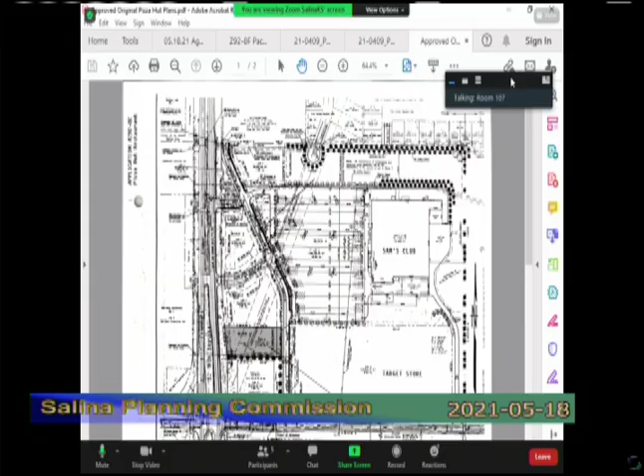By way of background, what is labeled or known as the Matlock Johnson addition was approved by the Planning Commission in 1992. That was a subdivision at the northeast corner of Schilling Road and South 9th Street, anchored by a brand new Sam's Club. There was a plat of 44 acres with multiple lots, including outlots along 9th Street. The City Commission gave final approval to ordinances that annexed and zoned that property back in 1992.

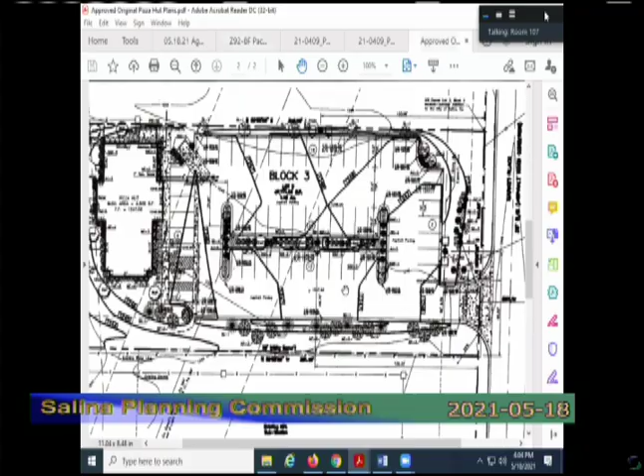It was a planned commercial district, so the ordinance provided that site plans for the remaining lots must be approved by the Planning Commission before building permits were issued. In April of 1994, Pizza Hut Restaurants filed an application requesting the Planning Commission approve their final site plan for a proposed 3,500 square foot Pizza Hut restaurant on the lot south of Red Lobster. That was essentially the 5th outlot outside of Sam's Club proposed for development, and it was the last lot to be developed in the subdivision.

Dustin, could you go back to the original layout of Matlock Johnson, the vicinity map? So the layout of the subdivision was 44 acres at this corner. You may recall that Schilling Road was nothing more than a dirt road at that time, so the developers constructed Schilling Road over to an access road here, and then constructed Marketplace as a frontage road.

You may recall that at some of our intersections like Belmont and 9th and other locations where we had frontage roads right next to 9th Street, there was barely room to stack one car or even get your car straightened out to make a turn. So we changed our planning philosophy on frontage roads—instead of having the frontage road run right next to 9th Street, you'd move it out so lots backed up to 9th Street, moving the frontage road away so you could have more room to stack traffic and move these entrances away.

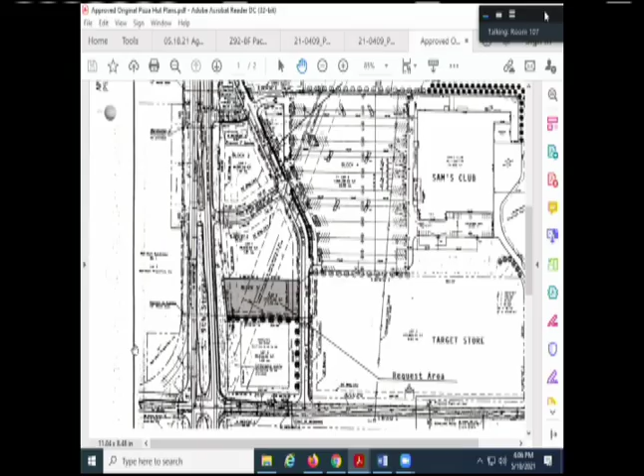This is a substation right here, and this lot is affected by a 100-foot wide transmission line easement that runs diagonally across the property. So the original plan had a single building, 3,500 square feet, covering only 7% of the lot. It had no direct access to 9th Street, and the front of the building faced east towards Marketplace. When it was originally developed, they had 57 parking spaces in that area. The building was pushed way to the west because it couldn't be built under these power lines, and that really influenced how the property was developed.

So the plan being put forward now is to essentially remove and rebuild that east building and turn the existing Pizza Hut restaurant into a delivery carry-out location only, with no indoor seating, adding a drive-up window on the south side of the building.

There's also a plan to create a second tenant space there. As you can see from the original Pizza Hut plan, the east portion of this lot was primarily used for parking or not used at all. So the owners are proposing to construct a new building with a 2,000 square foot footprint, which could be set up to accommodate 1 or 2 tenants, and also set up with a drive-through window on the west side if that's what the tenant desired.

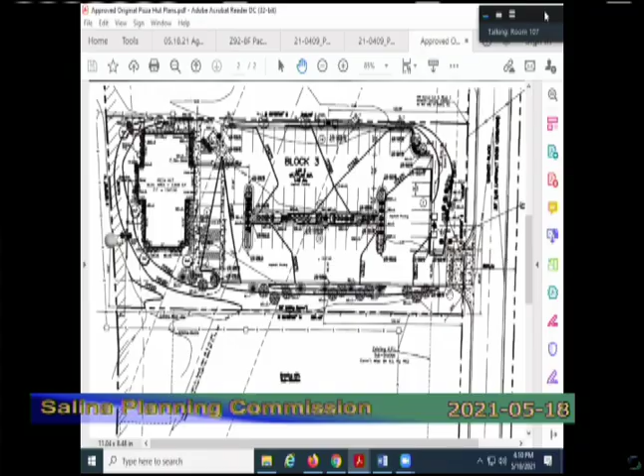The current driveway there is 25 feet in width, and the maximum driveway width allowed under city code is 30 feet measured at the property line. As part of this amended site plan, the property owner's designers are proposing to maintain the single driveway entrance on Marketplace, but they're proposing to expand it from 25 feet to 46 feet measured at the front property line, apparently to try to accommodate truck traffic and deliveries.

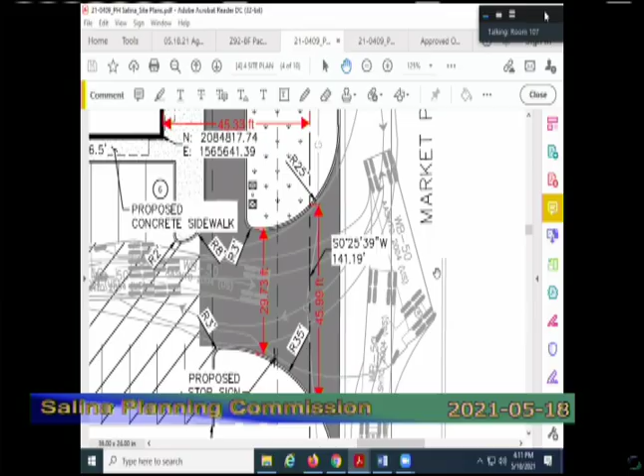In reviewing the plan, staff would note to the commission that in addition to exceeding the city's driveway width standards, the proposed driveway far exceeds the width of any other driveway on Marketplace and is even much wider than the street itself. Staff has reviewed this and believes the curb cut width being proposed is excessive. We've noted that Sam's Club and Target both receive truck deliveries, and none of their driveway openings are as wide as the driveway being proposed by the developer's designers. None of the driveways that serve the new Dillons store are that wide either, so staff believes that is excessive for the conditions currently on the lot.

Just by way of information, the city, based on the city code, measures the width of a driveway at the property line. What the designers have done is something that most haven't done, which is to try to increase or include the radius inside the property. On most driveways on public streets, the curve radius would start at the property line and fan out, but they have extended it farther in, which affects the measurement at the actual property line.

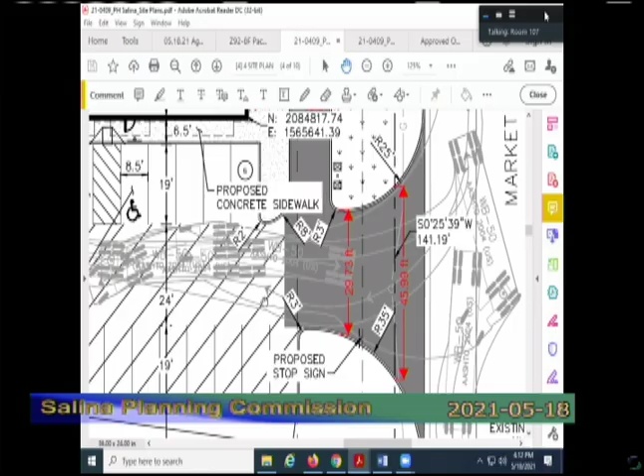So this measurement here is a reasonable width, right at 30 feet. We measure the width that makes that driveway width excessive. You can do what you want with the radiuses out within the right-of-way, but it's primarily this area here that is on private property that's wider than the city's driveway width standard and wider than any driveway anywhere in the vicinity.

As far as the public utilities and services and storm drainage, all the services that serve Pizza Hut are in place and can be reused for this redevelopment.

Dustin, I don't know, you could go back to an aerial photo or to the overall site plan for the subdivision.

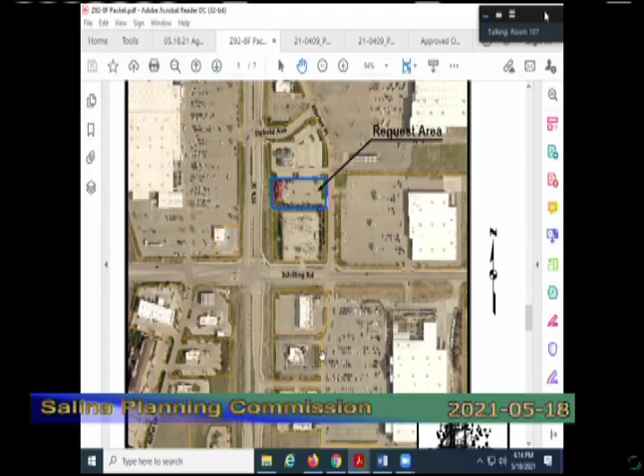Water from Sam's Club and from Marketplace here drains into this pond north of Sam's Club, and then there's a pump in that pond, and a pipe that comes all the way across here and sends the water right to this corner. It goes down 9th Street to a ditch that crosses over and goes that way. So the water first drains north and then it drains south, and the reason for that is there has been off-and-on flooding along South 9th Street from water moving south to north. This was essentially reverse engineered to send the water back here so it wouldn't be discharged to the north.

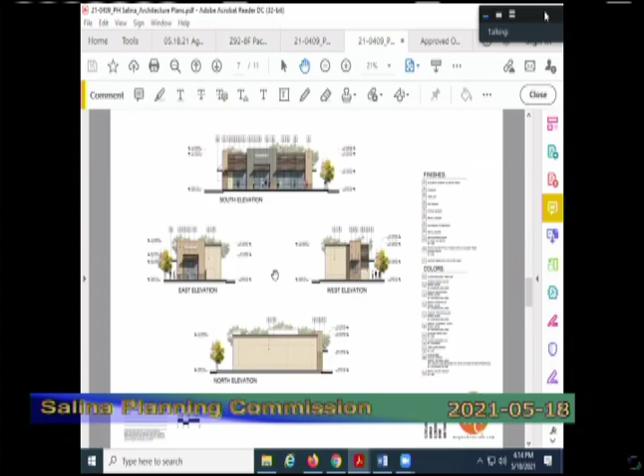The buildings that are proposed would be oriented to face east with their main storefronts facing Marketplace and secondary entrances on the south side. That is the east building. You can see the main storefront glass, the main width is the south elevation, but it will also have an elevation oriented towards Marketplace.

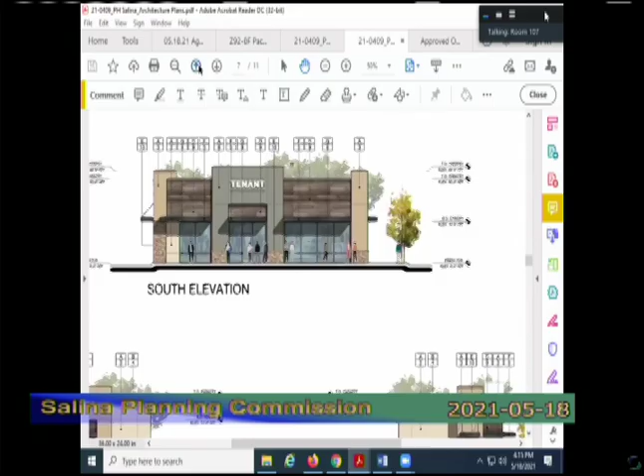Because Pizza Hut is transitioning to delivery or carry-out only, there will be a drive-through pickup window on the south side of the building. The east building face is being designed to accommodate a pickup window on the west side. So this south elevation facing the substation is where the pickup window for Pizza Hut would be.

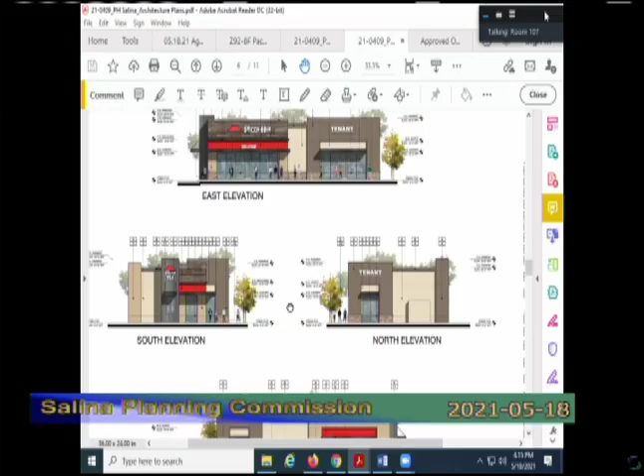This is what you would see from Marketplace. This is what you would see from 9th Street. And that is what is facing north towards Red Lobster.

The building setbacks all conform with minimum setback requirements. The west building, 27 feet from 9th Street, is pretty close to 9th Street compared to the other buildings along there, but it's because of that 100-foot wide Evergy transmission line easement that forces that building to the west.

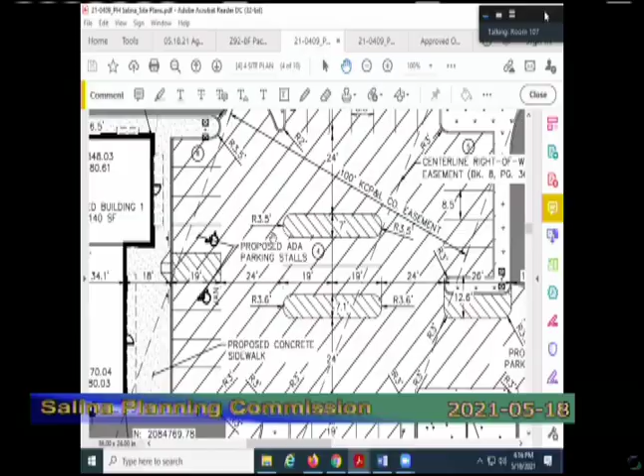So the big changes are that the lot coverage would increase from 7% to 10.7%. The other being that only 37% of the developed site would be green space.

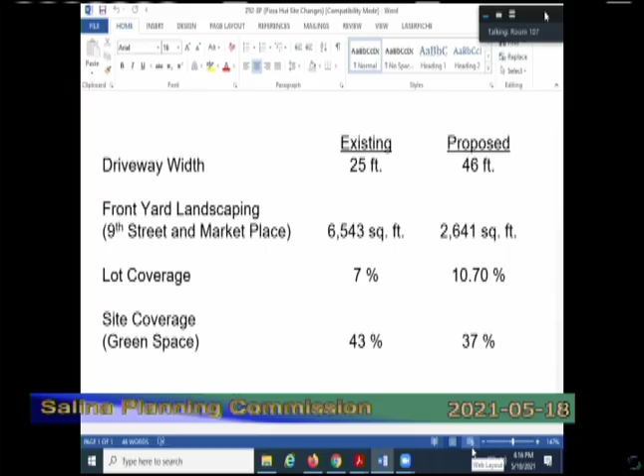As far as the building design, from what we can tell, the exteriors will be primarily cement plaster finish with stone veneer on the storefronts, mostly earth tone with slate color used to provide contrast. You can note the bright red canopies to identify the Pizza Hut.

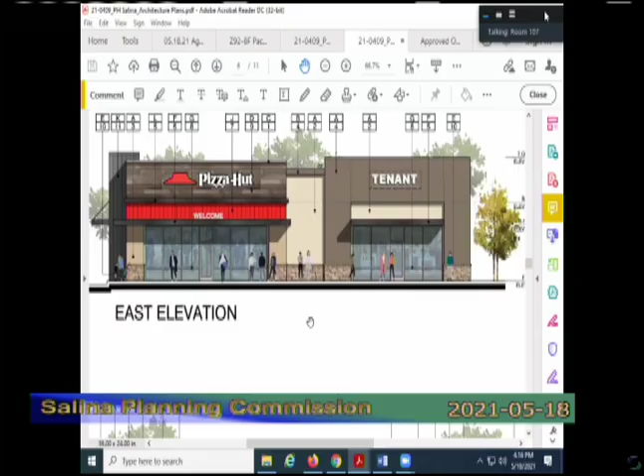As we noted, 45 spaces are being proposed. The primary reason for the reduction is the elimination of indoor dining at Pizza Hut. We've determined that 45 spaces is sufficient, and all of the dimensions within the parking lot and driving aisles meet the city's requirements.

Staff's only issue is with the width of the actual driveway approach on Marketplace.

There are no designated loading and unloading zones or areas designated on the site plan, but as we've discussed before, particularly with restaurants, in the alternative we've allowed the property owner to furnish staff with a written letter confirming that supply deliveries for Pizza Hut and other tenants would occur outside regular business hours. If you do that, it doesn't matter if drive aisles or parking spaces are occupied by delivering vehicles if it's after hours.

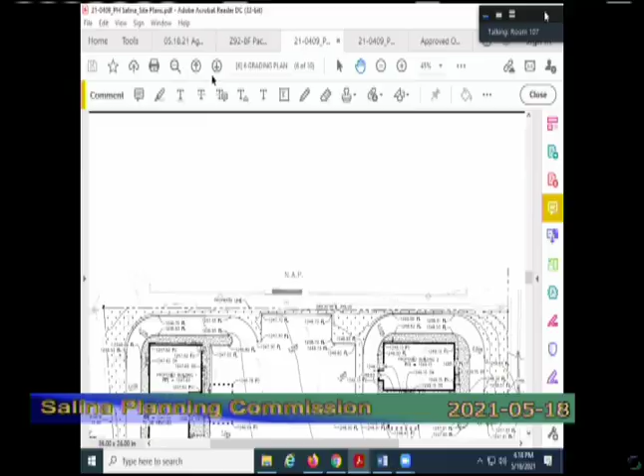The other thing we would note is that this development would have a requirement, with the two front yards, of a little over 3,900 square feet of front yard landscaped area, and they're providing about 2,600 square feet, about a third less than what would be required under our ordinance. The primary reasons for this are twofold: one is the drive-through lane paving added to the west side of the west building essentially substituting concrete paving for landscaping, and the wider your entrance drive is, the less space you have for front yard landscaping along South 9th Street.

One of the mitigating factors the designers and owners are facing is that transmission line easement. Because the building is pushed so far west, if you put a drive-through lane on the west side, you've pretty much wiped out the 27-foot front yard there, so there's much less space for landscaping.

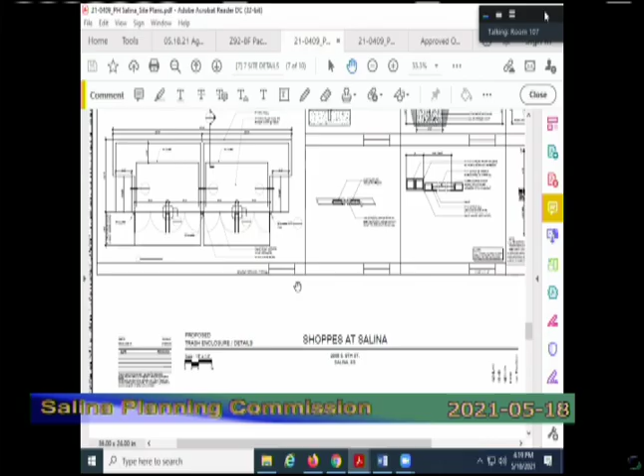If you look at the total amount of tree units provided, it's far less than what was shown on the original Pizza Hut plan, but is within the range in terms of actual plantings of what our landscape regulations would apply for a site like this with two front yards.

The only other subject we haven't touched on was signage, and we did not receive any kind of submittal related to ground or pole signs. The Planning Commission previously approved a 70-square-foot pole sign on 9th Street for Pizza Hut, and that sign may continue to be used or reused. Some of the elevation drawings did show wall signage, but that would be worked out with the owner as tenants come along.

So as you look at your alternatives this afternoon, we have reviewed the plan to determine compliance with city ordinances, regulations, and policies. The two areas that we determine do not comply with city standards are the amount of front yard green space and the width of the driveway on Marketplace.

You are to review the plans to determine if they demonstrate a satisfactory quality of design and compatibility with other uses and structures in the neighborhood. And so you could approve the proposed amended plan as submitted.

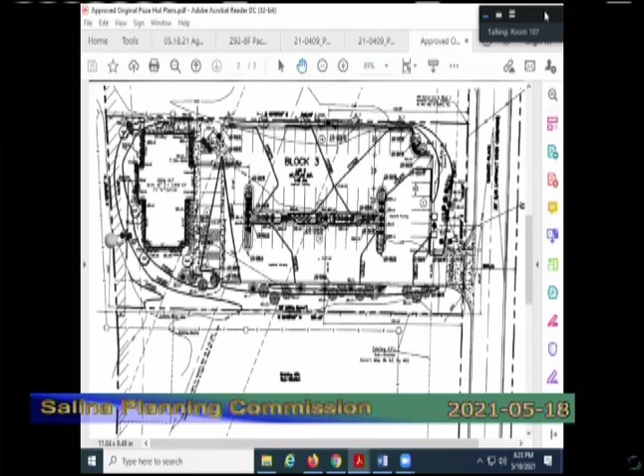The main thing, and it may or may not show up clearly here, is that here's the existing Pizza Hut building. So everything from this wall over to the 9th Street property line is green space and landscaping. And then if you go to the new plan, they have wrapped this driveway around the building.

So all this area that is landscaping today is being eliminated and replaced by paving. If you look at the front yard as the front 25 feet of the property on 9th Street, under the Pizza Hut original plan, 100% of the area between the building and the street was green space. Under this plan, a substantial part of it is paving. So by that very nature, the landscaping area has been reduced.

The question for the commission is you can make up for reduced area by having essentially the equivalent amount of plants or plantings that you would have if you had more area. We have a ratio that says if you're required to have a certain square foot area, you have to have a certain number of plant units within that area. They come close to having the number of plant units they would need if they had the full area, so they are attempting to compensate in two ways.

So it's a judgment call for you as a commission, or myself as a zoning administrator. I can reduce, and you can reduce, the amount of front yard green space if you think the intent of the landscaping regulations is still being met.

So we're just pointing out that the reason for the large reduction in total square footage is primarily because this was all green space today, and if you put this drive-through in there, you're reducing the green space. And then, of course, if you widen a driveway or add a driveway, then you're reducing the green space in the front yard along Marketplace as well.

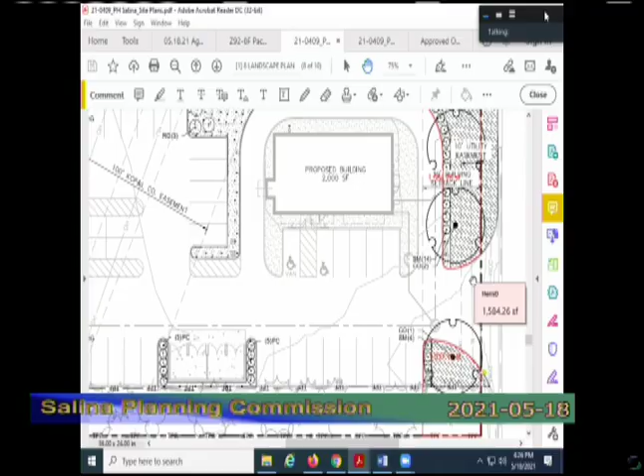So if they reduce the width of that driveway, it would help them out a bit by providing additional green space in the front yard along Marketplace.

There's nothing you could do on the west building, you can't shift the building. Well, can't you shift the building closer east and move everything east to have more green space along 9th Street? You can't do that because this is right to the edge, and Evergy will not allow it. They don't want tall trees, buildings, or fences, basically don't want anything vertical underneath their transmission line.

My take on it is that lot's definitely offering some challenges that are not the norm. So maybe a little leniency might be my opinion on it. I don't know if anybody else has any thoughts, I agree, Greg.

Yeah, there's not a lot of design options or shifting that they can do. And so if you're gonna have a drive-through lane, you can't shift everything to the east. So circulation-wise, that's the way it best works out. It doesn't really matter whether you have the pickup window on the west side or the south side, that's the circulation that works.

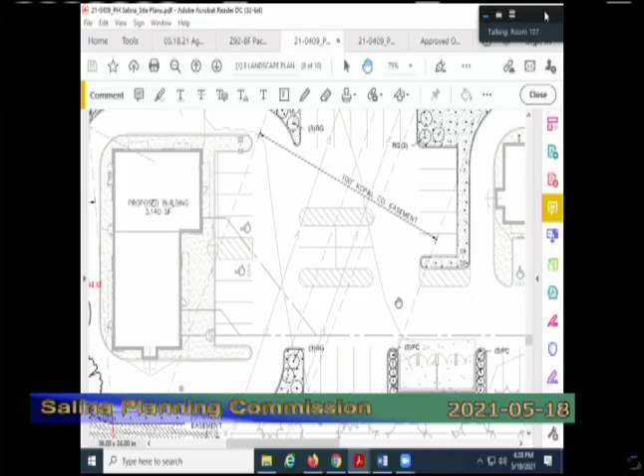And so we would expect that these would have curbs, but these are really peninsulas, though we give them credit as islands. We have a requirement in our landscape regulations that if a parking lot has more than 50 spaces, you have to set aside a certain amount for islands within the lot. Well, this parking lot's gone from over 50 to under 50, so essentially those islands are voluntary. Our ordinance puts an emphasis on front yard landscaping to buffer the building from the street, but you, as a commission, are perfectly free to recognize the efforts they've made for the internal landscaping as well.

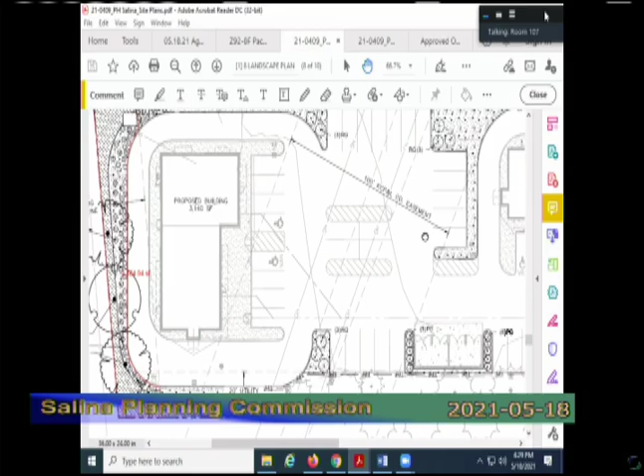So I have a question then on current city ordinance, it's 25 or up to 30 feet through the drive, 30 feet for the driveway, measured at the property line. Right, and so what is the issue with going with a larger width? Why does that become an issue on the city's part?

Why is it determined at 30? The reason it's at 30 is because the most common width is 25 feet, 30 is the max, and it's the same reason a 46-foot street would be confusing. If you have something that's 30 feet wide or 25 feet wide, you can essentially fit 2 cars in it, one coming out, one going in. But if it's 46 feet wide, people may think there's a separate left turn lane, or come out in pairs, or not know what the pattern is. So the reason for the 30-foot driveway is so cars know that one right side is for exiting and the other right side is for entering. But if you're at 46 feet, is it 2 lanes out, 1 lane in? Once you get over 30 feet, drivers don't really know how it's set up, unless you've got an island or something like that. So that's the basis for the 30 feet.

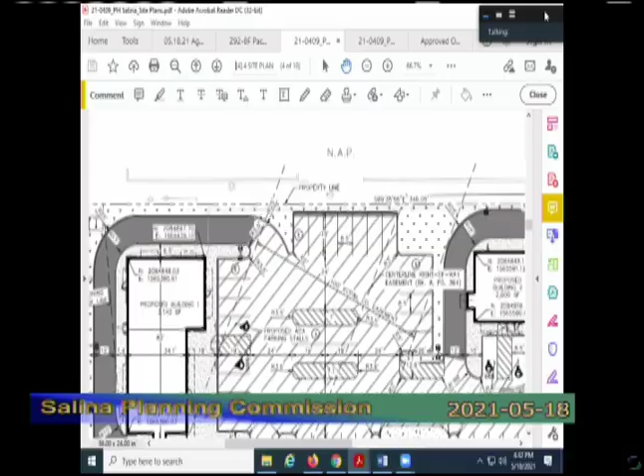Yeah, so for clarification, this says that the measurement is at the front property line, which is right where your cursor is, is that right? Correct. Okay, I'm just clarifying that. That's where the property line is, okay.

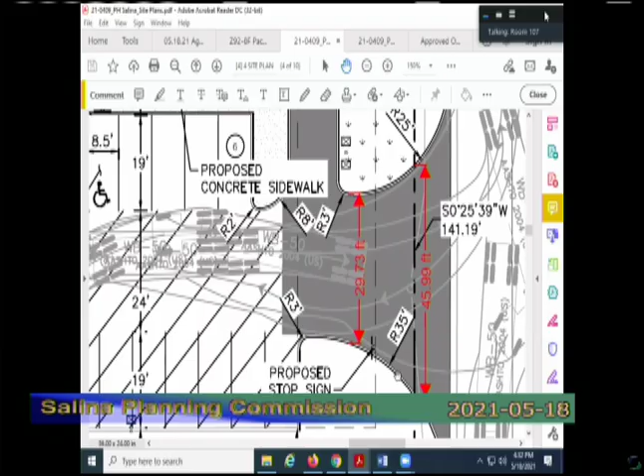So if they took this and extended it at the same angle out to here, and then started their radius, if they kept this same configuration and had the big sweeping radius, it's basically this area here. And you could say it's a technicality, but from the standpoint of being consistent and measuring that width at the property line, having a radius that sweeping is really unusual.

So what we tell people, especially places trying to accommodate trucks, is that you can have as sweeping a radius as you want out in the right-of-way, but once you get to the property line going in, it has to be a maximum of 30 feet.

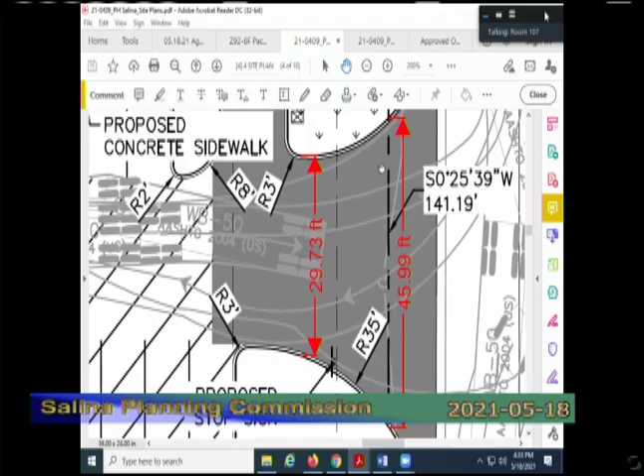The other challenge here is that if you have a street with 13 feet behind the curb, you have more space to have a radius. Here, there's only 8.5 feet from the curb to here, so if they straightened this out and then started the radius curve here, they could still have the sweeping radius for turns or to accommodate delivery trucks, but wouldn't have the 46 feet at the property line. So it's really the big sweeping radiuses that are affecting that.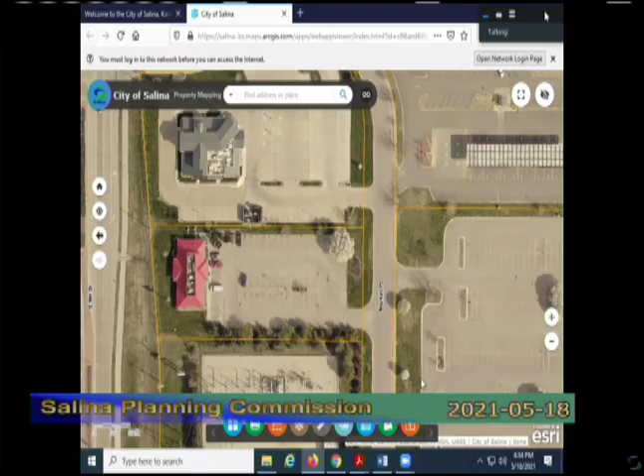So staying on this same vein, in our packet there's a diagram that shows the cars in the drive-through, total number of cars in each of the drive-throughs. Can you pull that up? Can you find the title for me? It says Shops at Salina, proposed site plan, site summary, and it shows vehicles in each of the drive-throughs. Maybe it's the architect's plans. Yep, that's it.

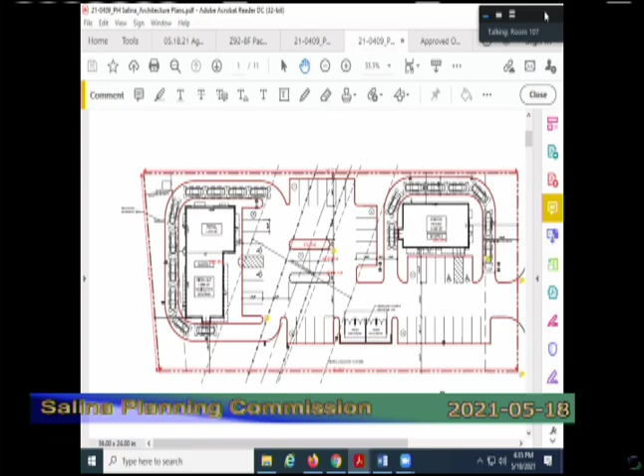So two questions going into this. The requirement for the number of cars through a drive-through, how many do they have to accommodate at the pickup window itself? And where would the ordering station actually end up being, say on this first one listed as a coffee house? My question is, if the order station is towards the front of the building, you're going to back traffic up as people are sitting there waiting to get in. I'm curious if that's not part of the reason for the wider drive and that sweep, that they're anticipating people stopped there, kind of around that corner getting into it.

Yeah, so to answer your question, what we require is 4 stacking spaces at what we call the ordering station, sometimes it's a window, sometimes a microphone setup, and another 4 at the pickup window, for a total of not less than 8. And so they're not actually showing where that ordering station would be, but that is important. In this design, it would have to be about where my cursor is here in order for them to have the appropriate stacking.

So Destin and I talk about that frequently, and I am frustrated every time I go there, but we misread the plans for the taco place in front of the mall. They have like 1 stacking space at the ordering station because we misread and they misidentified. What they have is 7 stacking spaces from the drive-up window to the ordering station, but only 1 stacking space at the ordering station, which means if you get very many cars there, they're all hanging out into the central mall. So Mr. Olson's point is well taken as far as the Taco Bell there goes.

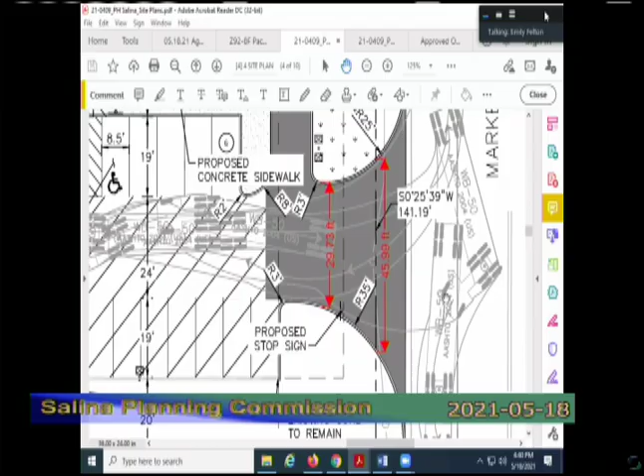Yes, my name is Emily Felton, I'm working with Monica on this project. You'll see grayed out in the background the exact reason why we're proposing this: we've got a WB50 truck who's going to come in and go back out. There's not enough room on site for them to turn around and for a truck to back directly out into our site, so that would be our why. They'll just have to swing out into adjacent lanes in order to make those deliveries work, and we're not anticipating those deliveries happening at peak hours.

As you can see, we discussed the loading here. We haven't designated loading spaces because we do not anticipate the loading to occur during normal business hours. But to answer the question on the table, I believe we can get it down to 30 feet at the property line. Okay, thank you very much.

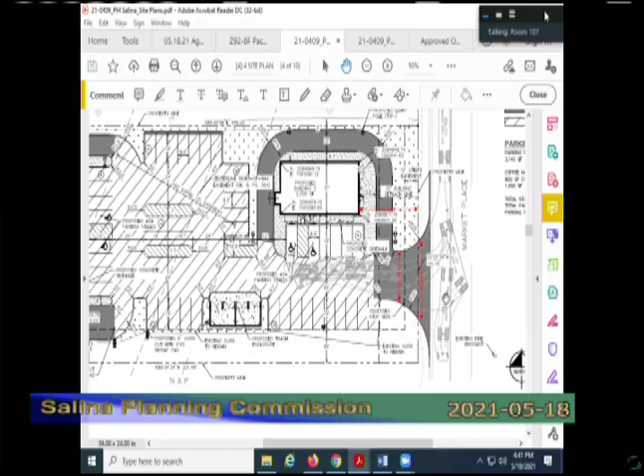And I missed part of that—where's the proposed loading at for each of those locations on this diagram currently? Yeah, so the proposed loading, the truck, you see it grayed out in the background on your screen, thanks for sharing. The truck is just proposed to pull straight in and then pull straight back out. There is no striped area. The loading is—because the loading is not occurring during peak hours, there's not a designated station or parking space for this.

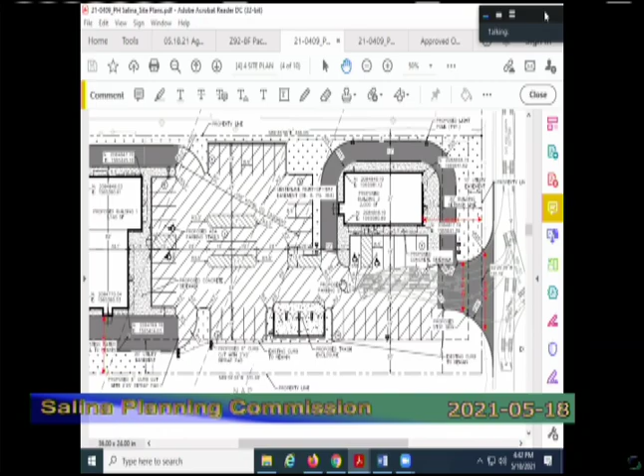So what they're saying is consistent with what we've had with Freddy's and Chick-fil-A and others: rather than taking up space or designating a specific spot for a loading-unloading zone like you might have behind a grocery store or behind Sam's Club, what they're proposing is that they'll just utilize these areas, and we don't want them to be in conflict with when they have customers there. So what they would do is just agree that deliveries for the two tenant buildings would occur after business hours, so there wouldn't be any conflict, and that's kind of common with trash pickup as well. A lot of these businesses arrange to have their trash picked up at 5 or 5:30 in the morning when they're not open for business, so the trash trucks and delivery trucks aren't conflicting with parked vehicles. That's fairly common when you have a food service business.

I can see the 46 feet if a semi's going to have to park and back out, though. I know it's an odd situation on an odd lot, but... Yeah, it's not so much the ability to have 46 feet, it's just where the 46-foot width is. There's nothing wrong with their radiuses, it's just a matter of where the taper starts.

Any other questions for the applicant? We just wanted them to reiterate their approach to the landscaping plan, and what the deciding factors were in their design and proposal. Obviously the addition of the drive-through lane west of the west building eliminates that green space, but we'd like to ask what the guiding principles were for what they're trying to achieve with their landscape plan.

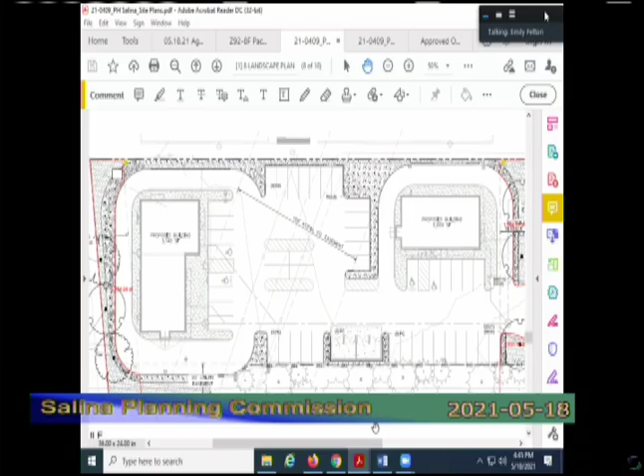Yes, you'll see a little bit grayed back on the north side of our plan, adjacent to parking to the north. You've all been out to the Red Lobster—what we're showing as our drive-through limits is consistent with their paving limits, and actually ours are a bit more conservative than theirs. As for the overall landscaping plan, we have some great big trees on the south side of our site, so we've taken every effort to preserve those.

You've heard some pavement and curb being kept intact just to keep those trees healthy, and we're adding landscape wherever we can between the buildings. I'm not sure if you all can pull up Google Earth—it's a little gray out there right now. While the square footage may not show that we're adding additional landscaping, the whole middle of that island, I don't know that you can call that landscaping. I think it is by code, but we're certainly trying to improve on the existing condition.

Yeah, exactly—there's a lot of hardscaping there, which I think actually counts, and some shrubs, but we're really looking to give that an upgrade with the other proposed landscaping around the site. So is that a good enough explanation? And actually, this is a great aerial image.

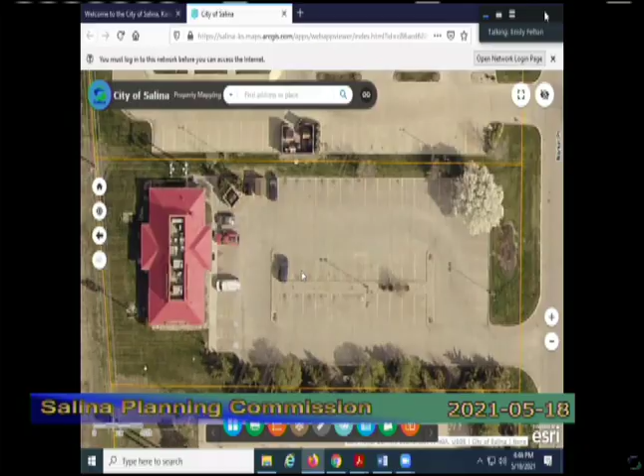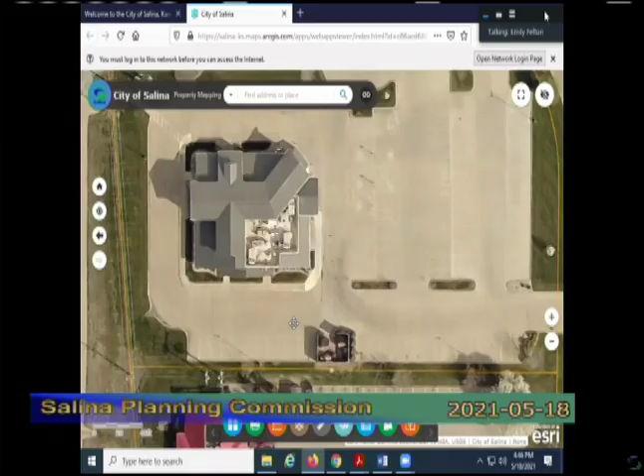You'll see how close the driveway is north of our site with Red Lobster. So the reason we felt it was okay to put a drive-through on the west side of our site is consistent with the site to the north. We're actually not as far west as they are with our pavement limits—we're mirroring what's out there today.

Yeah, I think we're primarily just trying to best understand what landscaping that was there today you were going to try to preserve, and what was going to just be starting from scratch new. So that helps a lot.

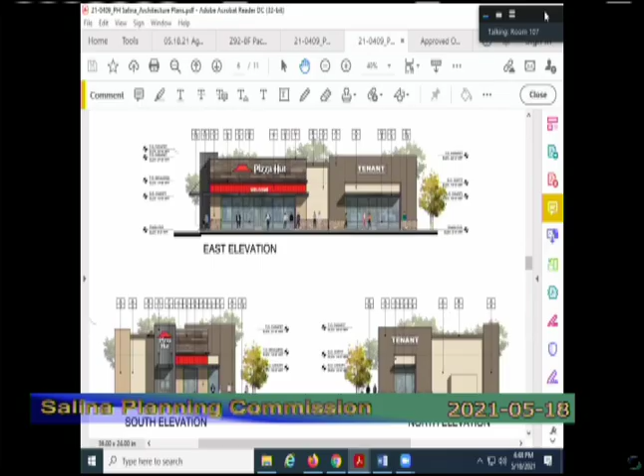Yeah, primarily—there's an existing pole sign out along 9th Street. I think that pole sign, square footage wise, might be the smallest one along that frontage. So if you said you want to reuse the existing pole but increase the sign area, that would be fine. I think this board is primarily interested in whether you're looking to add additional freestanding signs, or a sign on Marketplace, or any of those things. That would be good to know at today's meeting before they act.

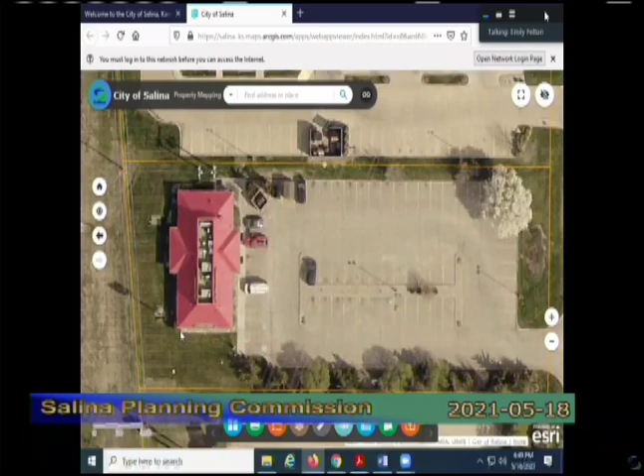Gotcha, yes—and so one additional, but yes, you're exactly right. We would look to reuse that existing pole sign and then add a sign underneath for future tenants, since Pizza Hut will no longer be the only tenant here. We would like to add to the square footage of that sign, and then a monument sign along.

So I think those were the four areas where staff had some questions: the driveway opening, the front yard total area, the loading and unloading, and any planned signage. I think the applicant hit on all those. The only thing I would point out...

would be to look at condition number 1 on page 8, and given that the applicant is requesting the addition of a monument sign, it may be appropriate, if the Planning Commission is supportive of that, to amend condition number 1—instead of the word 'or,' have the word 'and,' so that signage shall be limited to one pole sign and one ground sign, as opposed to or. Given their plans to put a monument sign out along Marketplace, we would want to accommodate that in condition number 1.

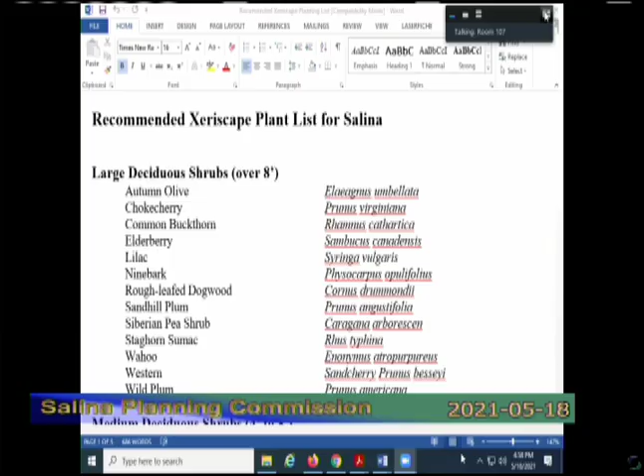And so in our research and conversations with subject matter experts, we came up with a number of people that we engaged and worked with to create a recommended xeriscape plant list. The individuals and entities we worked with at that time were the Salina City Forester, Steve Blue, who has since retired, the K-State Extension Office, the Dyck Arboretum of the Plains out of Hesston, and local landscape providers who were actively designing plans and maintaining existing landscaping. This recommended list consists of different types of plantings: shade trees, ornamental trees, shrubs, ground covers, flowers

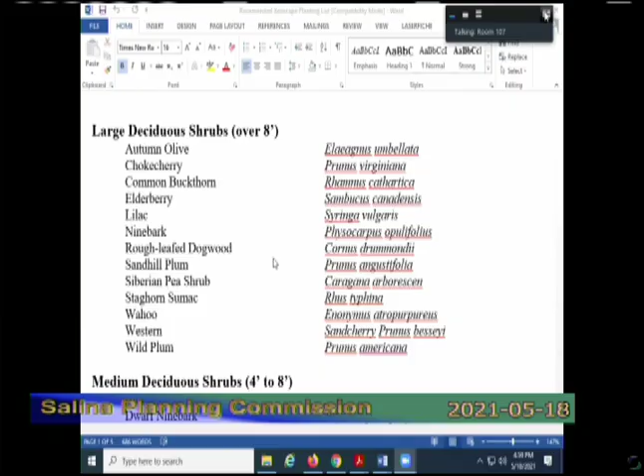that are conducive to our climate zone and annual rainfall, and are hardy to hot conditions as well as cold conditions, because here in Kansas we get extremes on both ends, and not all plants can handle that situation. So what we have is a list of plantings that, if selected, will

have a high chance of survival with minimal maintenance. And the reason we're bringing this up today is that in the past there have been commissioners with a couple of concerns. The first concern is that this list was created in 2008, and since then other varieties of plantings have become available, with many being more popular, meaning that some of the plants and trees on the recommended list are a little more difficult to find now than in 2008 and may need to be replaced, or new modern plantings that are more readily available but achieve the same characteristics could be added.

Another concern is that the list doesn't identify which plantings are native and which aren't — it doesn't differentiate between native and non-native plantings. It's been our observation, and in conversations we've had with the board, that some commissioners may be interested in reviewing the recommended list and engaging subject matter experts again, similar to what we did in 2008, to create a new updated list. So that's really what we're here to talk about.

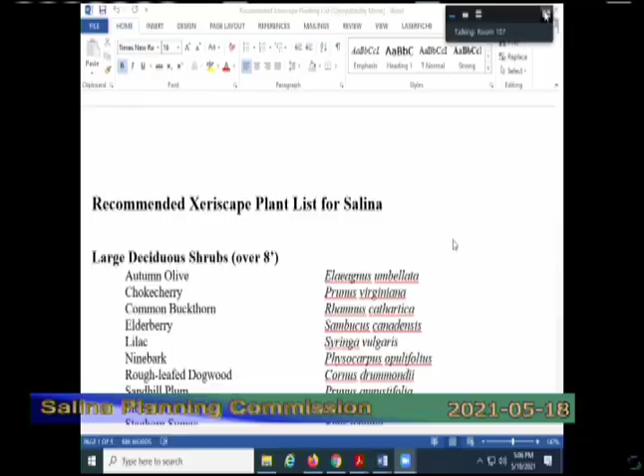Yeah, and I didn't have a third option under alternatives, but with Commissioner Baffa not being here and being one of the commissioners that's really passionate about this, a third option could be to postpone in-depth conversation to when he's here, if that's something you're interested in. But so you could direct us to re-engage a list of people we've already identified as subject matter experts, but you can add any names or contacts you might have, or you could just say the list is good for now and we can visit it at another time. Those are the three options.

I think we'd be remiss if we didn't include Commissioner Baffa in this conversation. I'm sure he'd have, it's just unfortunate he's not here, but I'm sure he'd have some very valuable input. And obviously Commissioner Barnhart's going to have a tremendous amount of information for us as well. And that'll give me time - I might be able to pull together some people too that might be interested in helping us out with that.

Yeah, definitely include the local businesses. That's the primary thing, is that we don't want to miss anybody that could provide us with knowledgeable input, and so letting Mr. Bernhardt digest this and maybe come back and give us some thoughts so that we can get this distributed out and get some input.